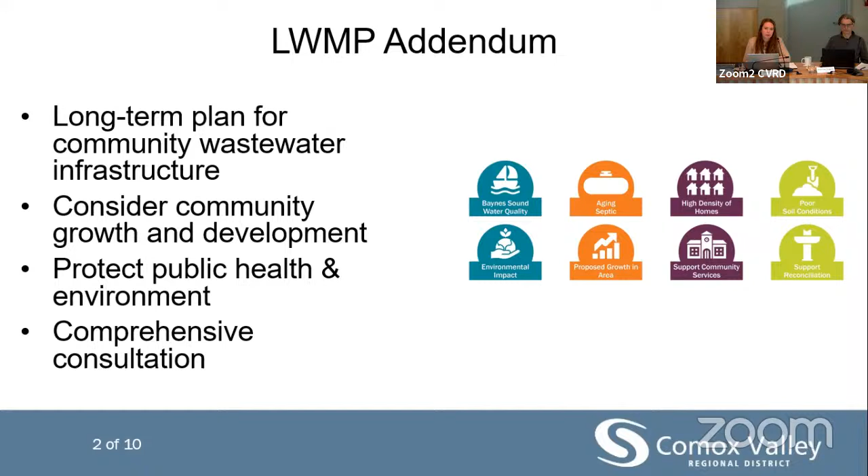So we've also shown this slide at past meetings, but I just wanted to present it again as a refresher on how this LWMP addendum process fits into the overall Comox Valley Sewerage Service liquid waste management planning process.

The purpose of the addendum is to include consideration of the South region and the Sewer Extension South project within the recently completed Comox Valley Sewage Service Stage 1 and 2 LWMP. This is because of the expansion of the Comox Valley Sewage Service area in August 2022 to include Royston, Union Bay, and K'ómoks lands.

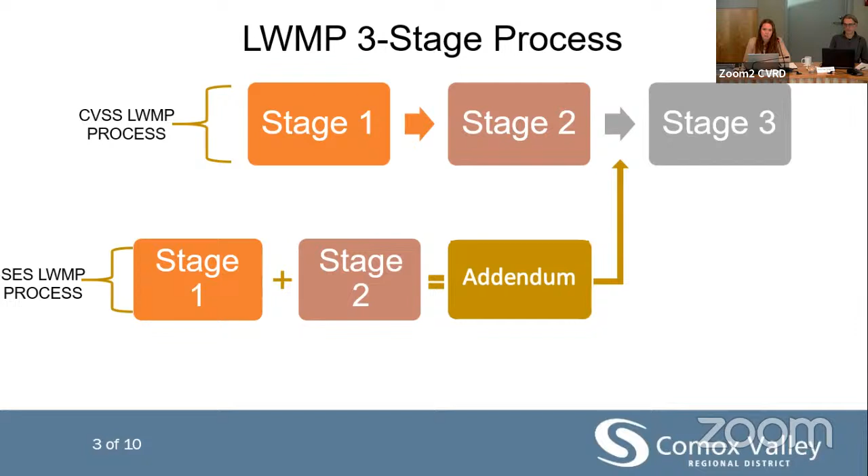These processes, once we've completed the addendum, will then be combined for Stage 3, and the Sewer Extension South project will be further advanced in the Stage 3 plan. The Stage 3 plan will then be submitted to the Minister of Environment and Climate Change Strategy for approval.

So the draft addendum report is a summary of all of the information we've discussed over the last 4 meetings, along with an updated preliminary design for the collection systems, which WSP will review following this, as well as updated project cost estimates. The draft report is generally divided into 7 main sections, and I'm going to go through each of these briefly over the next several slides.

I didn't include a slide on section 1 as it just provides an introduction to the plan and acknowledgements.

So development of the addendum is following provincial LWMP guidelines, including the involvement of this committee, the TACPAC, consultation with First Nations and the public.

Section 2 of the report includes a summary of TACPAC meetings to date, with all of our meeting minutes and materials attached as appendices. It also includes a summary of consultation with K'ómoks First Nation and other First Nations with an interest in the plan area, as well as a summary of public consultation to date, which Christian has just provided an overview for us.

And this section will generally be updated in the final draft addendum report to include a summary of the upcoming consultation activities in early 2024.

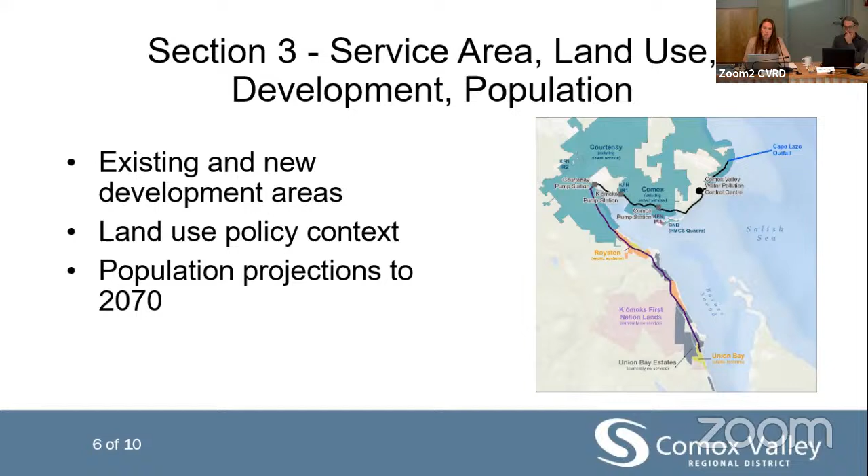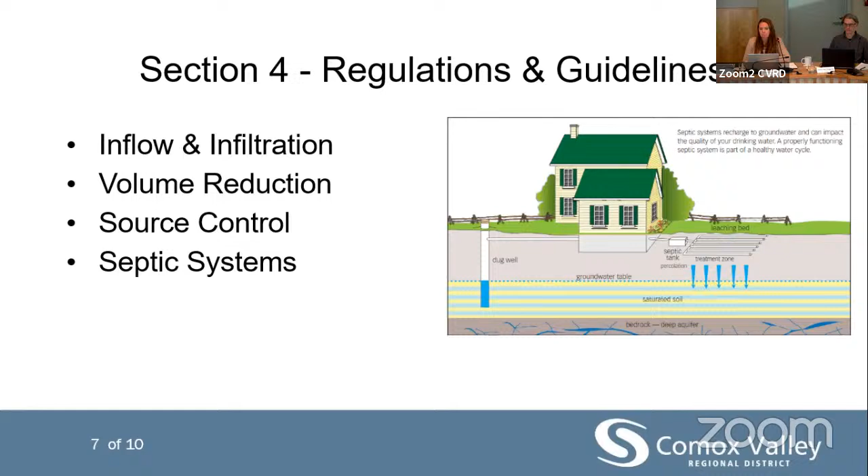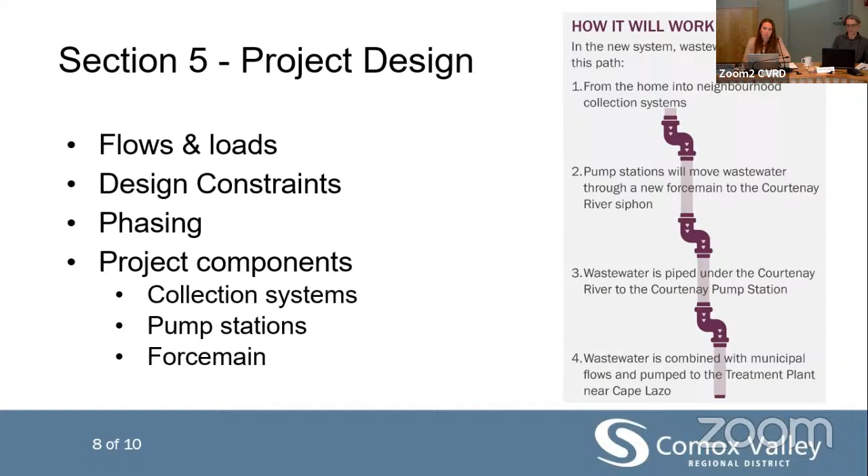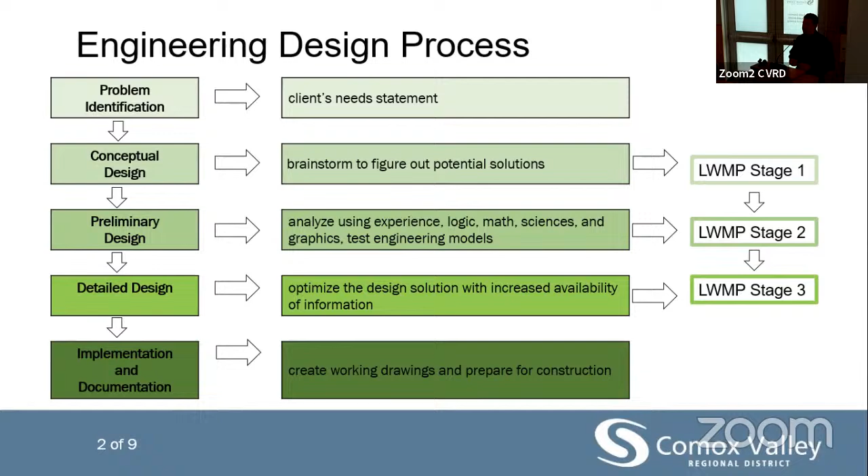The preliminary stage 2 will be in the preliminary design phase. So this is where we are now with this process. And then the liquid waste management stage 3 is at the beginning of the detailed design phase. So it's not on the construction level drawings, but we get to the point where we have more detailed design and we go through a process to get more information to get that out. All right, next slide, please, Vince.

So when we looked at this model, we looked at very high level information - a Google Earth level type survey. We got the information, made sure what we want to convey, and went through this whole process. We looked at the high level information, and we'll go through how the views changed, but basically we get the lines on paper.

We show the pipelines, we have idea, we have experience, and we show how it typically should look. Some of this information, when we sat in the office, is not easy to see, all the statutory rights of way. So we assumed high level information, and some of the questions at the open house was, do we really need this right of way through my property? Because now it's a negotiation, and that's why the CVRD asked us, can't we change this? Can't we go more to a road? And we tried our best.

So we went through the exercise to reduce the statutory right of ways as much as we can, so there's not this discussion and negotiation issue. You don't have to worry about the municipality needing to get access to a pipe that's not specifically yours in your backyard. So we tried to move away from that.

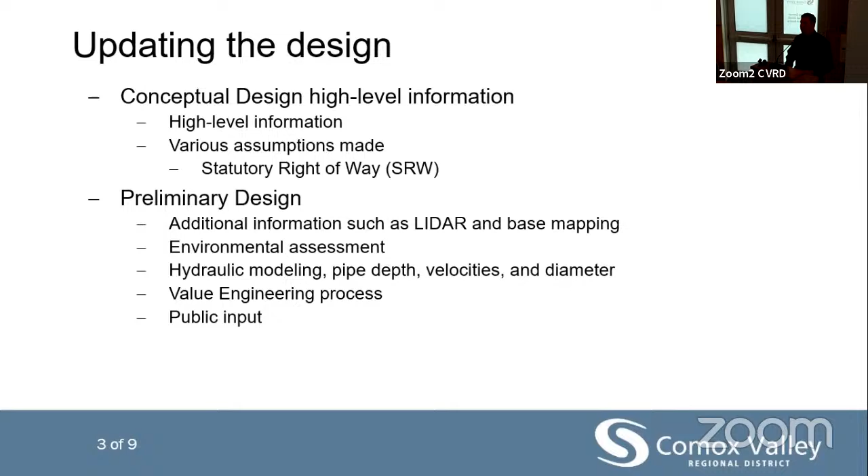Then we moved over to the preliminary design where we ran the model, so we can accurately predict at this point the velocities, the pipe diameters, what is needed. Every time you get an up and down in a pipe, you need an air valve, for instance, you need more isolation valves, and that's very difficult to do at the conceptual design stage.

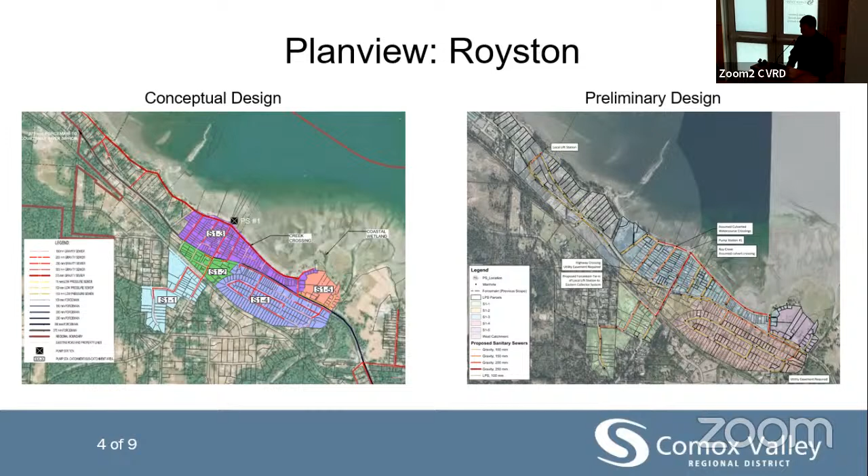Same for the Union Bay - you assume some population in this area, or count the number of properties, and assume that flow is a 150 millimeter diameter pipe. You put that through, and once again, it's a high level look at everything before we start developing this model.

On the Kilmarnock, when we looked at that design, we already had enough information from Union Bay and Royston that we could use to quickly move to Kilmarnock. So we didn't need to go through that high level conceptual stage - there was a high level one, but we quickly moved to preliminary design because we had so much more information, so we can predict much more - the pipe diameter, the LPS, all of that is visible.

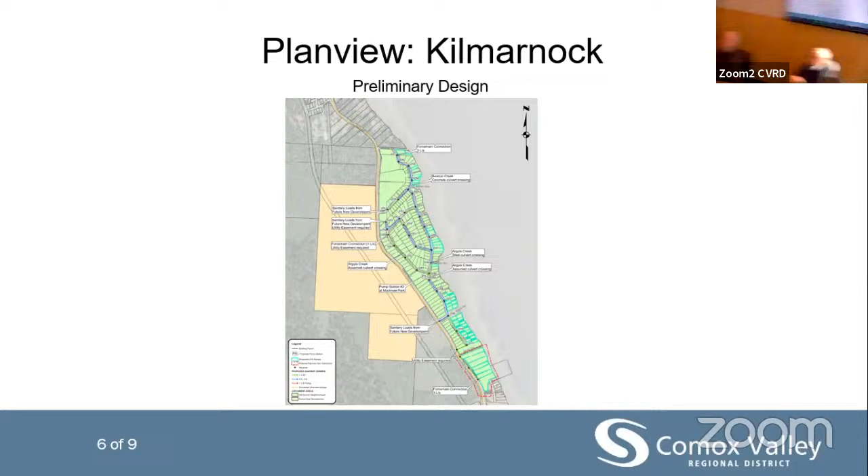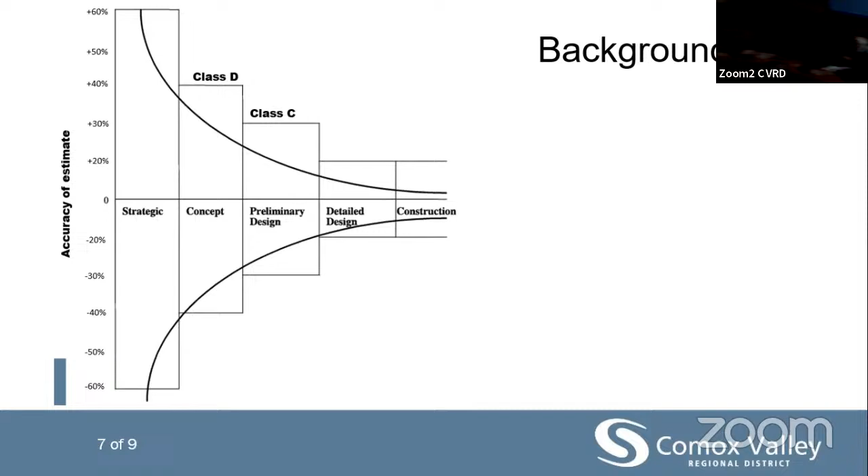So this is an idea of how we get to this point, how the designs change. The more information you get, the more you update the design, the more accurate it is. You don't want to get to a point in construction where you sit with the risk of design errors, because that's where it costs you - that's where the cost can balloon very quickly. So that's where we started.

So if we look at the costing side, you'll see - Ian, can we just take a pause there? Any questions at this point about this process, moving from one level of design to another?

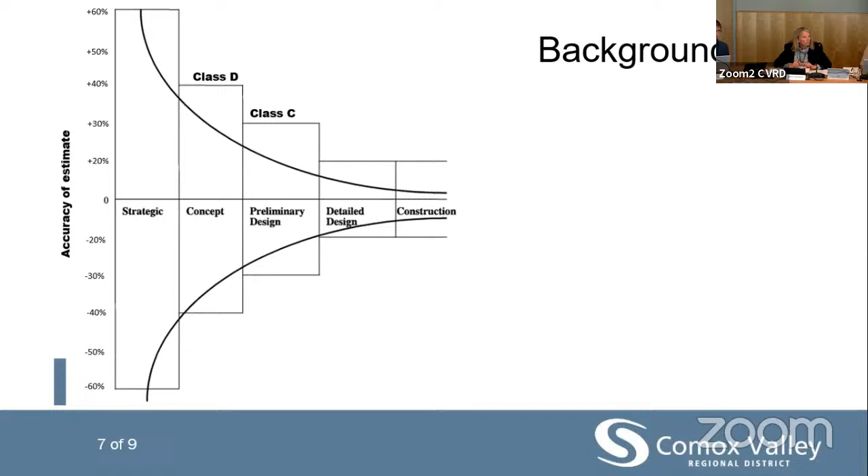Maybe this question's a bit early, but as you refined your design to make your costing estimates, did you also look at the impact on residents by rejigging the collection system? Because we've already put those numbers out there, the cost for the homeowner to connect to the collection system. If the collection system is rejigged and moved in some manner, did you look at what those cost changes might be? In other words, if the pipe's no longer in my backyard but out here, is it going to cost the residents more money to hook up?

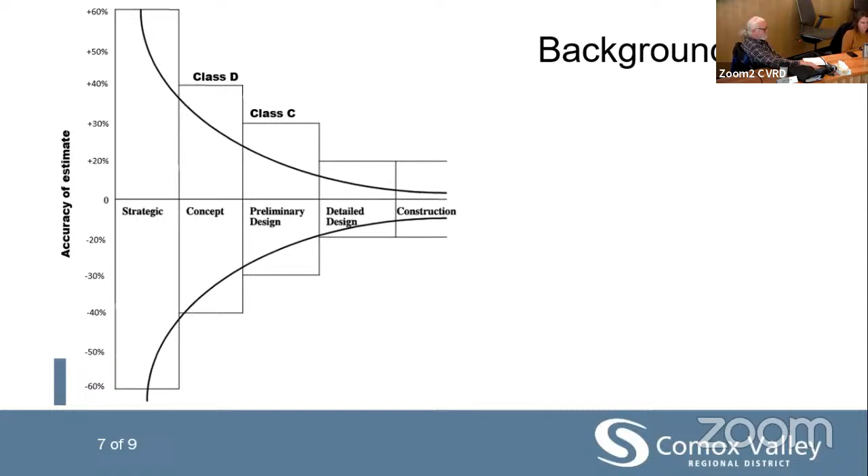Yeah, so we went through a long process of looking at the cost and the cost implications, not just on the capital side but on the residents as well. We did our best to reduce all of that, because you'll see on the previous map, if we need to move out of a right of way and into the road, it shows now as an LPS where otherwise it would have been a gravity system, for instance. However, that costing does not take into account the negotiation with a client.

Because at our eye level it's difficult to measure the impact on the resident - how do you measure somebody coming into your yard on a monthly basis? So we'd rather reduce the nuisance of having people on your property if they need to visit, change a line, or break the line. So it's not as easy as just adding a cost to that.

But once again, for the resident itself, we try to reduce the LPS as much as we can. So we try to balance the depth of the pipelines with the LPS number. We tried to accommodate that as much as we could, Jim.

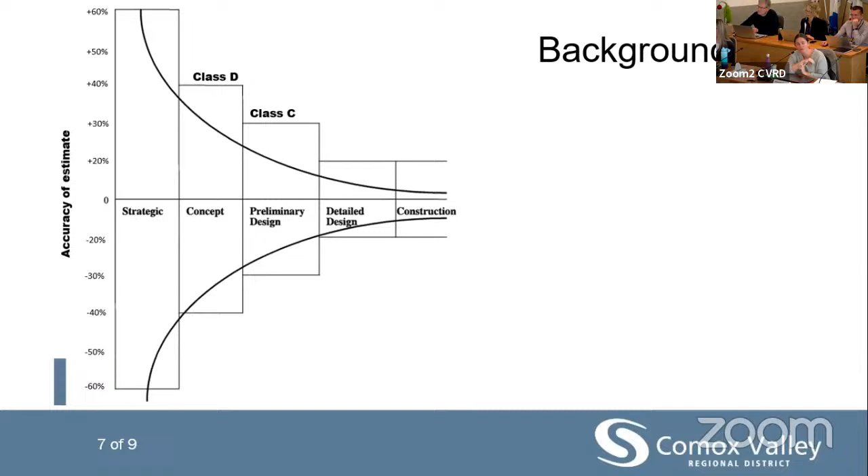Could you give us just an example of what that might have looked like somewhere on the map? Vince, can we go back to Union Bay? I don't have my mouse in front of me, but if we look at the top area, I don't have it pointed - can I move to that side?

So on these ones, you'll see there's a pipeline between the properties. So now it means that either side of the property will have to have a right of way negotiated. That means if I say statutory right of way, it means lawyer cost, it means everybody needs to get involved and they need to be able to get access to it. The only reason we did that at the conceptual level is now we can reduce the LPS for this potential.

Remember, we did not look much at the levels at this point - we just assumed nobody has very deep basement in this portion. So we assumed that if we do it in between, we'd reduce the LPS. So then we said, well, is that really worth it?

And at the open house, the intention was no, we don't want to discuss this, we don't want people on our property, let's move it into the street. So we know we don't need lawyers to discuss the statutory right of way. But one side of the property will be able to do it by gravity, and a few of the houses on the other side - once again, depending on your level.

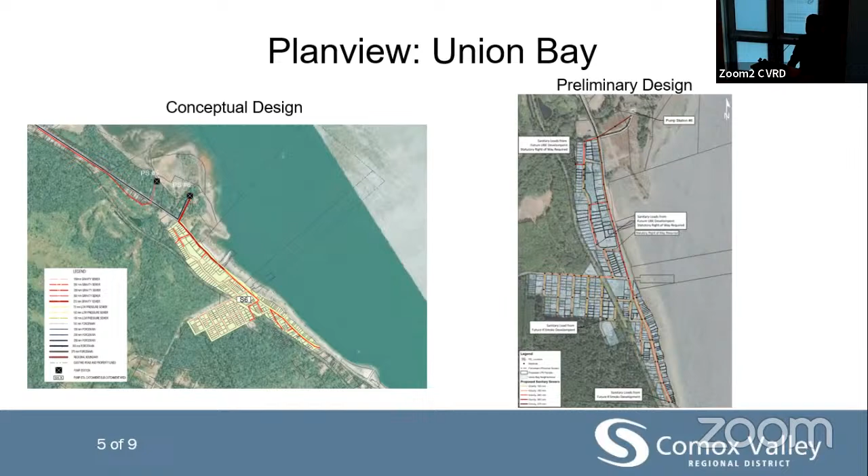In engineering, this is basically how we get to our design cost. At the strategic level, on the scope statement side, you start off with plus or minus 60%, you're not sure what you're going to get out. You have the plan, and the more information you get, as we move to a Class D, which we were with the collection system previously, we have the idea and try to get our funds to plus or minus 40%. That's on the stage 1-ish side.

Once again, there's a lot of information missing, like we looked at the previous slide. So we try to get the survey, the geotech, all of this information, the environmental assessment, to make sure where we cannot go. Then we move down to a Class C estimate, closer to plus or minus 30%. Once the project goes ahead and you go to detailed design, you can go down to plus or minus 20 to 10%. That's typically the range where you predict construction costs. That's how you angle this thing down to make sure you have all the information you can.

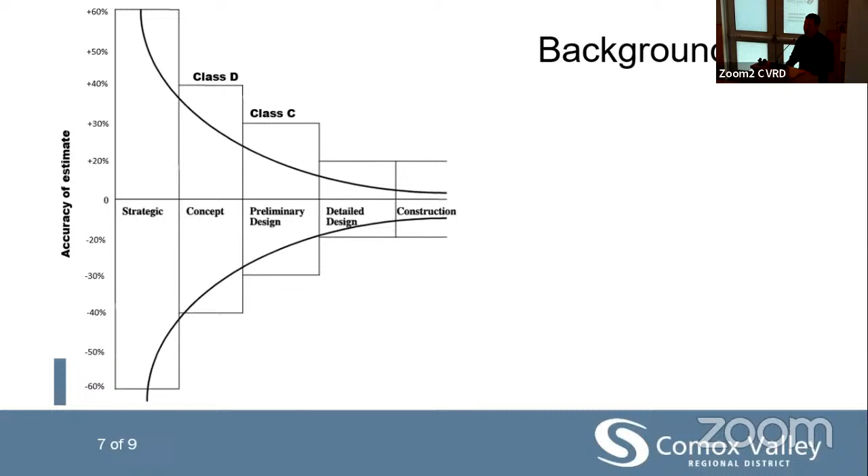Next slide please. You'll see in this costing there are some changes that happened in the design, it looked a bit different. Like I said, we had additional information with the LiDAR. We ran the hydraulic modeling so we could determine the diameter of the pipes, the depth of the pipe, the amount of isolation valves, the service connections - all of that is needed. We could get that much more accurately.

Then from the previous cost, close to the end of COVID when we did the initial cost, we saw inflation went up and down, construction costs went up and down. Once again, the design update - we had some changes on the highway and the railway crossing. Then we had public input, and we made some very conservative assumptions previously on imported fill, which we changed, and that will have an impact on the costing as well.

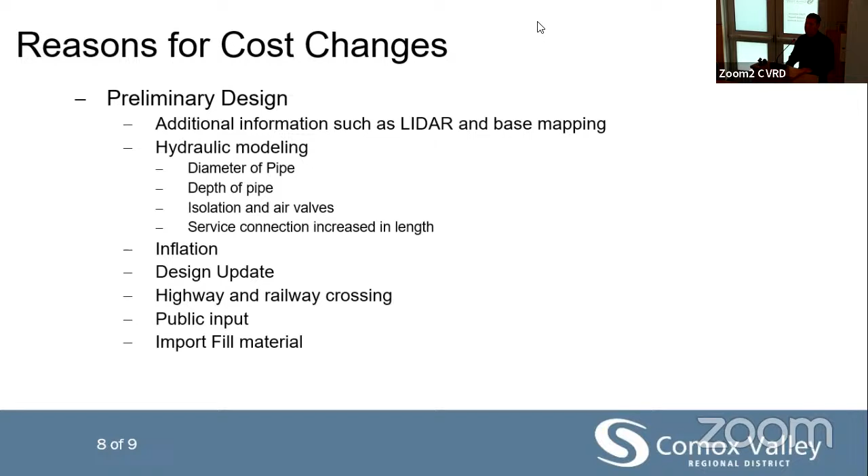Next slide, Vince. All right, if we look at the force main for this whole section, from north - that's the force main all the way through from Union Bay to Royston. However, that cost went down by just over $4 million, and one of the reasons is we made conservative estimates, so that price went down.

On the collection system, Kilmarnock went down, but all the others were higher because we had to make some changes. Kilmarnock was at a preliminary design and we refined that. The force main was at a preliminary design and we refined that even more. The collection system went from a conceptual design to a prelim design, so that's why some of the costing and neighborhoods changed. It's very difficult to compare apples to apples, because some areas changed - we increased a few numbers and decreased others.

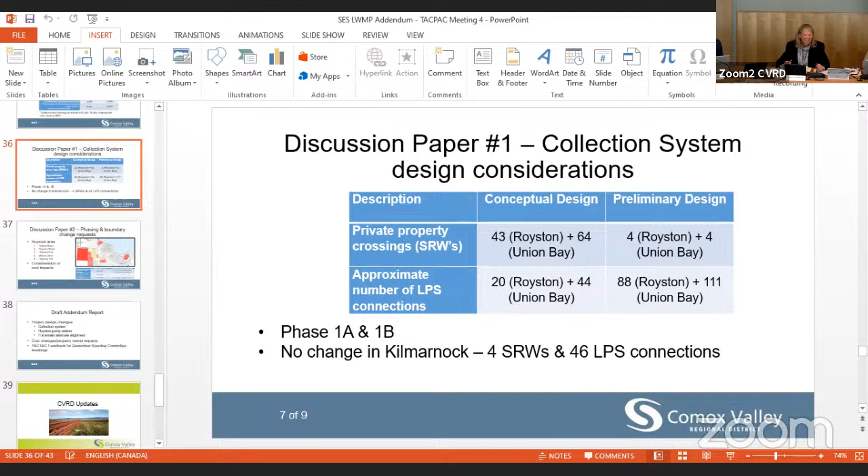Bear with me a second, I'm just going to get the slide deck going again. Sorry about that, I just threw you right off. Too many things on my screen, I can't get to the menu. Sorry about that. There we go. From current, there. Okay, yeah, thank you, Allison.

So this discussion paper number 1 was included with the agenda, and the main purpose of it was to pick up where Ian left off in describing the changes in the collection system design between the conceptual design presented at the public open houses in June and the updated preliminary design that Ian discussed. Really what it comes down to is the difference in the statutory rights of way required. As Ian noted, there are legal costs associated with acquiring those, as well as survey costs and compensation costs to property owners for the use of that property, and potentially even to restore what was there before the property was dug up to install sewer pipes.

So the table on the screen summarizes what those differences look like. As you can see, for the conceptual design, there were a considerable number of private property crossings - approximately 43 in the Royston area plus 64 in the Union Bay area. That's a fair bit of effort in order to secure statutory rights of way over that quantity of properties in order to proceed with installing public sewer infrastructure in those areas.

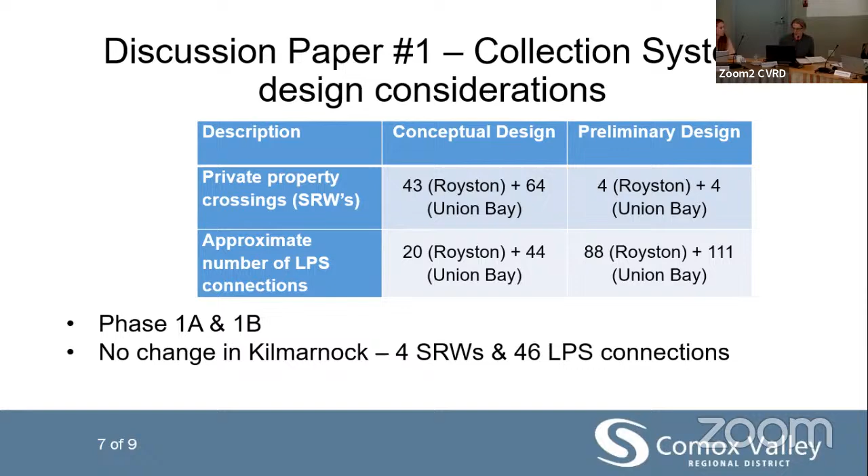Okay, Vince. Okay, thank you. I'll move along to discussion paper number 2.

For the next 2, a property on Hayward Avenue and properties on Marine Drive at the western edge of Royston, the properties in question here would be able to connect to already proposed phase 1A infrastructure via LPS connections.

Additional to these 5 Royston requests, we've also been approached by the Kingfisher Resort and Spa that has expressed interest in connecting in an earlier project phase.

So in the discussion paper, the table on page 3 includes some considerations for these requests. And as cost is one of the primary public concerns regarding the project, a suggested approach is to consider these change requests where they can be made with little to no overall increase in per property costs for everybody else.

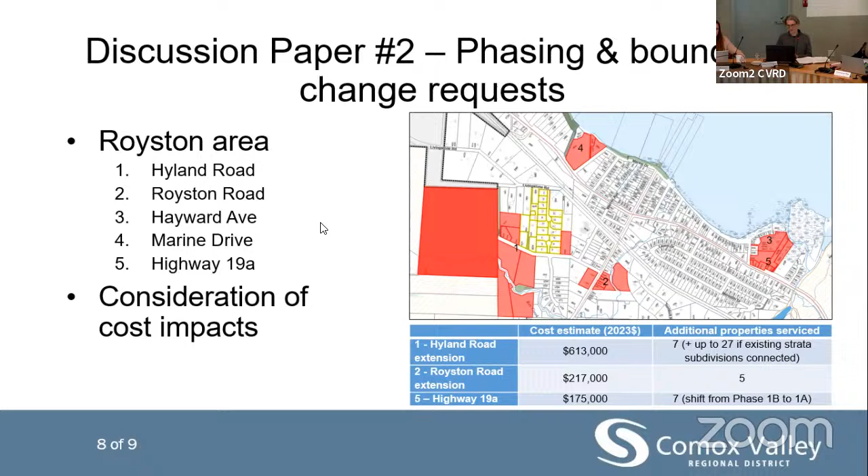I think this next slide here was just to give the committee another chance to consider the project design changes in the draft addendum report from what's been previously presented to this committee. We've already talked a fair bit about the collection system changes.

There are some potential changes on the Royston pump station subsequent to the last committee meeting in March. The Royston WSP did some more work looking at options on the Royston pump station to improve its resiliency to coastal flood events. So one of the appendices to the report includes WSP's memo on flood mitigation options for the Royston pump station.

The other thing that was looked at was an alternate alignment for the force main using a portion of the E&N rail corridor instead of completely running the force main along Highway 19A. At this point, for the force main, the estimates provided are for an alignment along 19A, but the addendum report does speak to the potential use where it is advantageous to align or to use the E&N corridor for a portion as we get into detailed design.

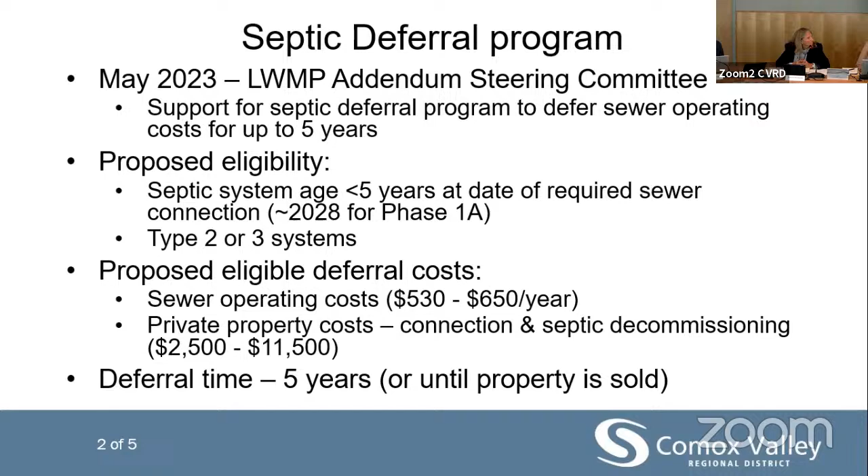Any other questions about this or the septic deferral program? Okay, Vince?

Okay, yeah, the next item is the septic mandatory maintenance program. This is just one slide to summarize a report that was presented to the Electoral Areas Services Committee back in October, and it was referred to this committee as well. So at that October meeting, there was support expressed for a region-wide mandatory maintenance program. This would see mandatory inspections in high-risk areas, as well as mandatory pump outs in all other areas.

We've done some analysis and further engagement with provincial staff, and we've had some legal advice on this. Out of all this, in order for the regional district to impose requirements for septic systems, we would require BC cabinet approval of an order in council to provide the regional district the authority to move into this area of public health. So what we're aiming at is some public engagement in the spring on the program concept.

In support of an order in council request in the summer of 2024. So pending receipt of the order in council, a service establishment process would proceed in 2025, and if supported by residents, the regulatory program could then start up in 2026.

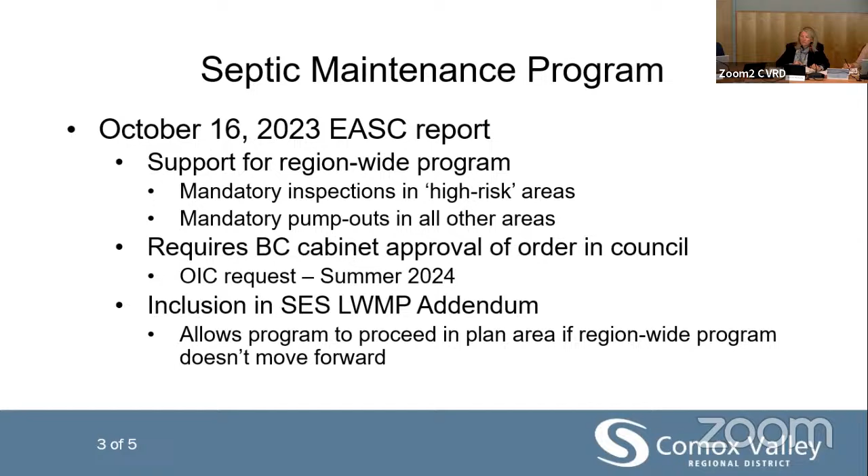Yeah, that's correct. So we'll be sending out a cancellation notice for that meeting shortly and trying to rebook something in March or April.

I assume that meets with your approval. You just want to not have this committee end, I think, right? So just draw it out a little bit longer.

And that's our agenda for today, correct? Yeah, it is. I'm not sure how we made it through so quickly. And I'm also not sure if lunch is even here yet. But we'll check on that.